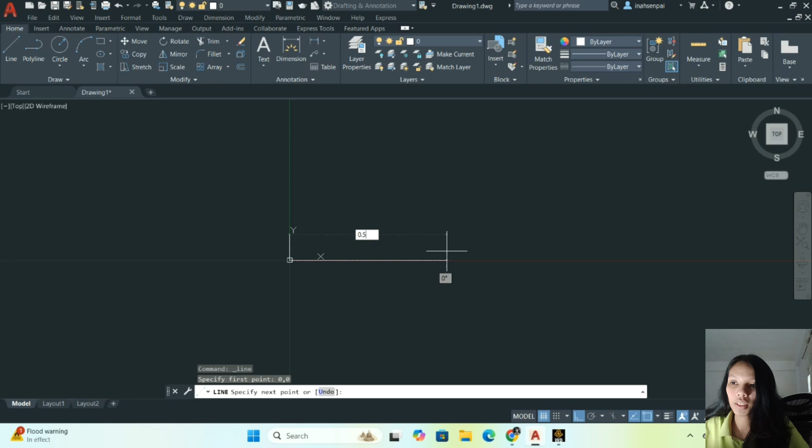First things first, open AutoCAD and make a line. Line it 0.5 by 1 meter, and then 0.5 again and then 1 meter.

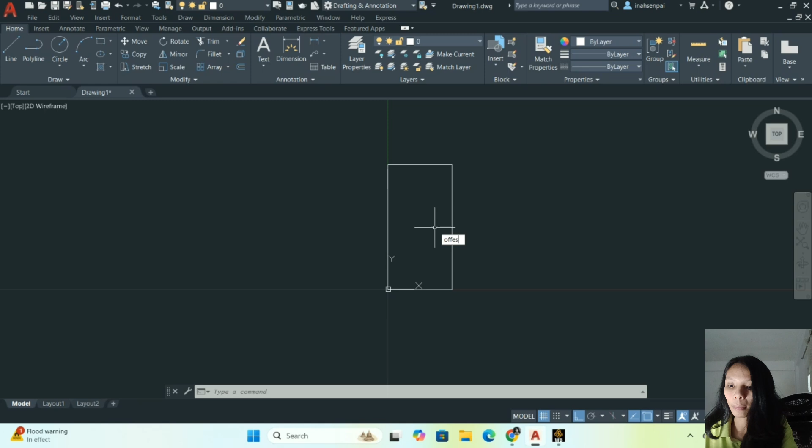My Y is 40% of 0.5, so let's offset it by 0.2.

And then we'll make it 3D. So command, press pull.

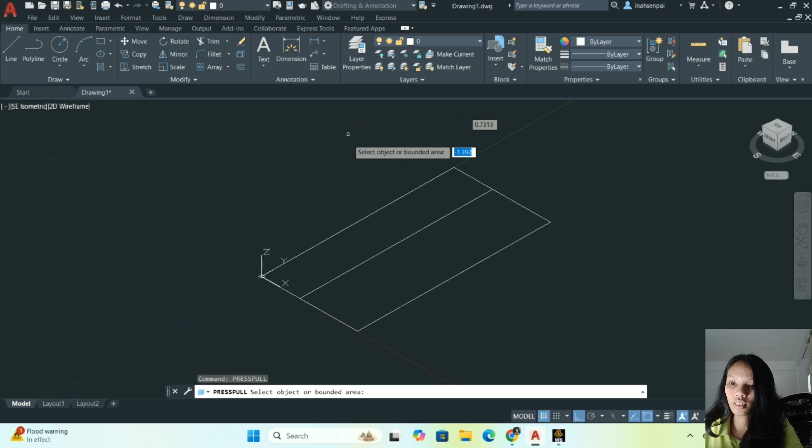Press pull it by 1 meter. And this side too is 1 meter. And then it should be shaded, and then we can export it.

Here, drawing 1 na lang, IGS, and then save. Click and then enter.

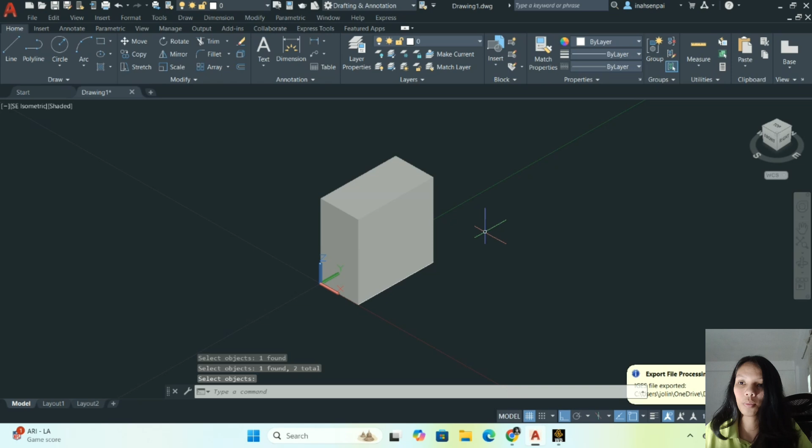Then we will open the workbench app, then drag the steady state thermal, and then click the geometry and insert it.

And then double click the model. Let's wait for it.

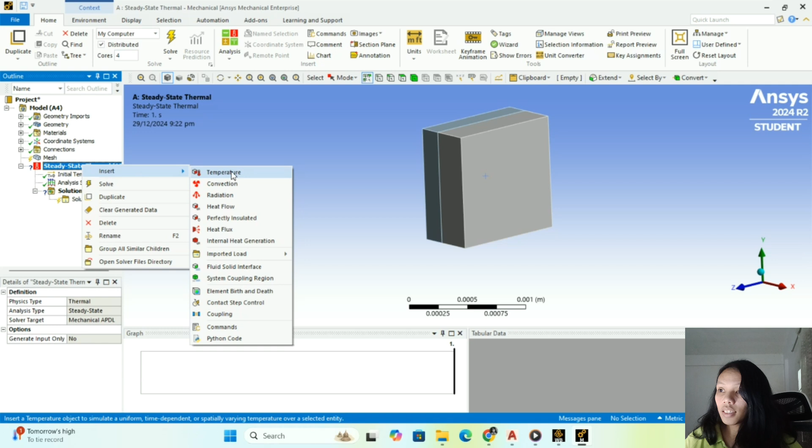We will add temperature, 500 degrees. And then insert another temperature here, 25 degrees.

So, mesh, we can solve it.

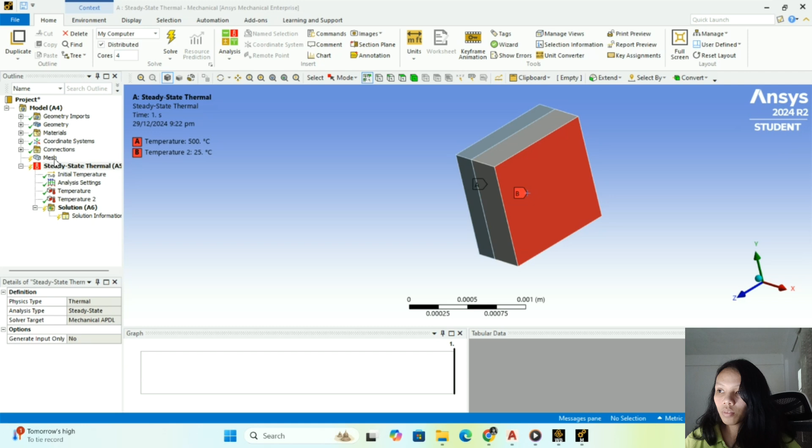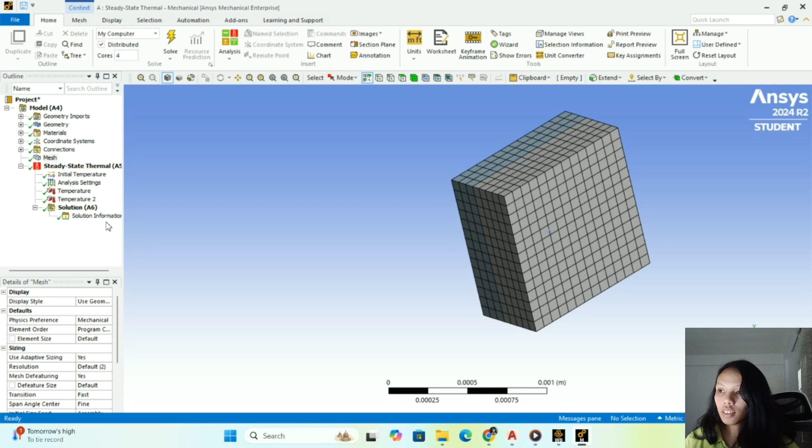And there it is. And then for the solution, insert temperature, and then insert total heat flux, and then solve.

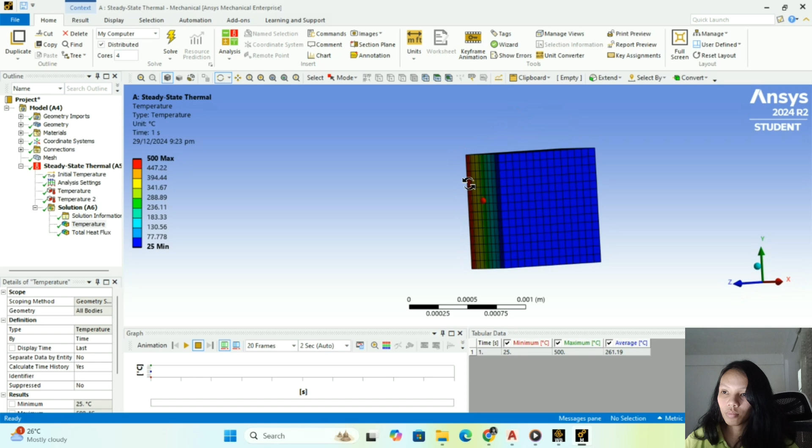And then we can print preview it. The subject is heat transfer. The author is me. And then print, and then save.

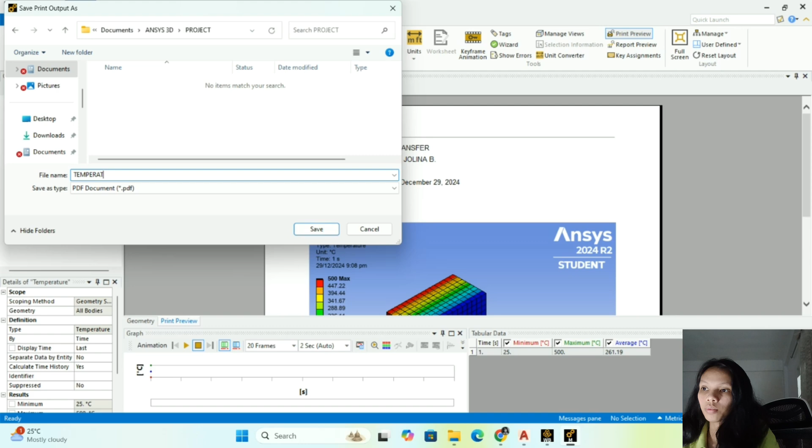Temperature. Also for the total heat flux, the subject is heat transfer, the author is me. And then print.

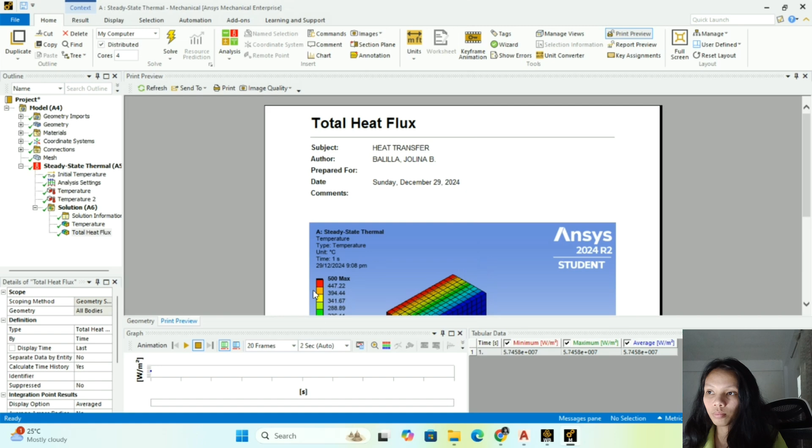Then also the report preview. Let's print it. Project. Save. And that would be all.